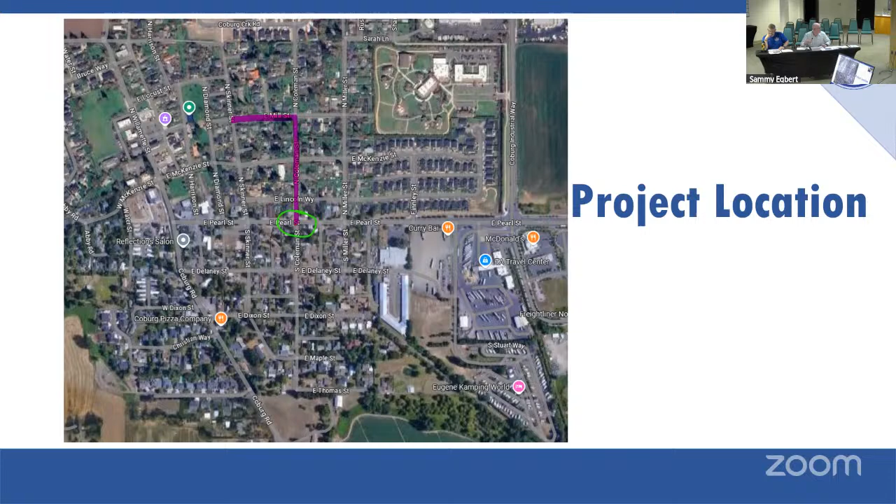The next slide gets into our actual transportation system plan designations. This is from 2014, the TSP, which at some point we've talked about a bit.

So this side of town, the west side, doesn't have any streets with a collector designation. Those are all local streets that go straight to North Willamette, which functions, kind of skips the collector step and goes from neighborhood street to arterial and functions well. If those streets connected as a network, it might be a different story, but they don't.

So the primary collector that we have is the Coleman Street spine, that then turns on the south end as Dixon, and on the north end does multiple jogs.

For money reasons and for TSP and policy reasons, we've broken this into phases. The money I described, 748,000, we're hoping that we hit the mark there. We may be a little bit over, depending on what the market has when we add engineering to it.

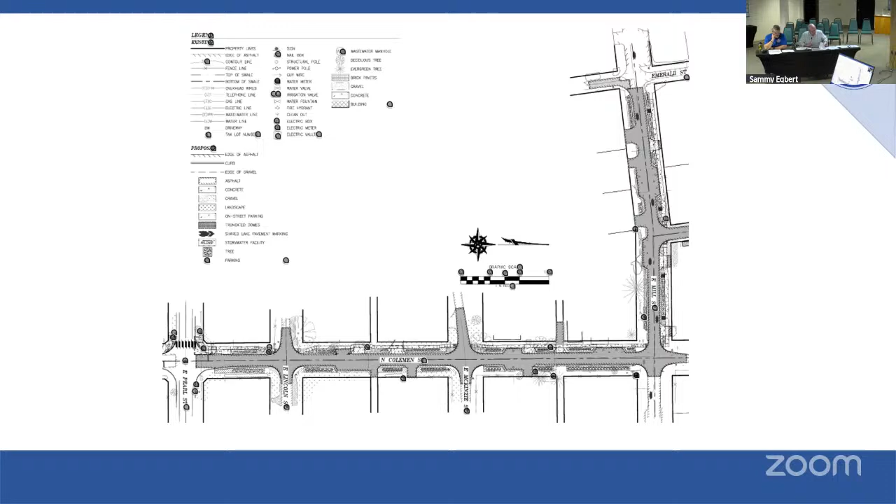Trying to think of where the slide is—one part of the memo talks about some access issues, and one of the goals is, where possible, to utilize alleys for access rather than extra driveways.

Thanks, okay, yeah, I know I'm bouncing around a little bit. That's perfect, thank you.

So we have one site in particular where we've really focused, instead of having two auxiliary driveways near an alley, we've consolidated that by extending the alley improvement and having people come off the alley. Their alley will be paved and they come off of that. That might be the easiest.

That's one of the considerations, and one of the standards in the street standards is to attempt where possible to minimize driveways, to encourage shared driveways. This one, right? Yeah, so there were kind of two informal driveways here. If we maintain the existing pattern and just paved where people had been doing things, we would have a driveway in this area both to the right and the left of it.

We've shifted the storm drainage to ensure this one is a full width access for this property, but their secondary access now comes off the alley. And this one, we've extended as much parking as we possibly could, moved some of this storm drainage here, and then came off the alley. So instead of coming off the side here, they'll come in with a paved alley and turn in, still having access to the rear of their yard, just a slightly different way.

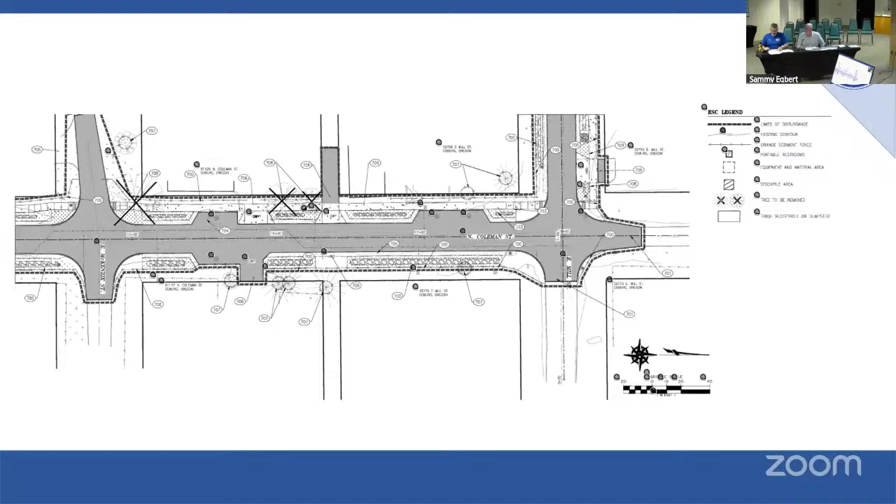There are some trees - one significant one, but it's been rough by nature and by humans. It's one of the bigger, older ones, and it's probably due anyway, plus a few smaller ones. So it's not significant on tree removal, but there are some. That might be a blessing in disguise. Agreed.

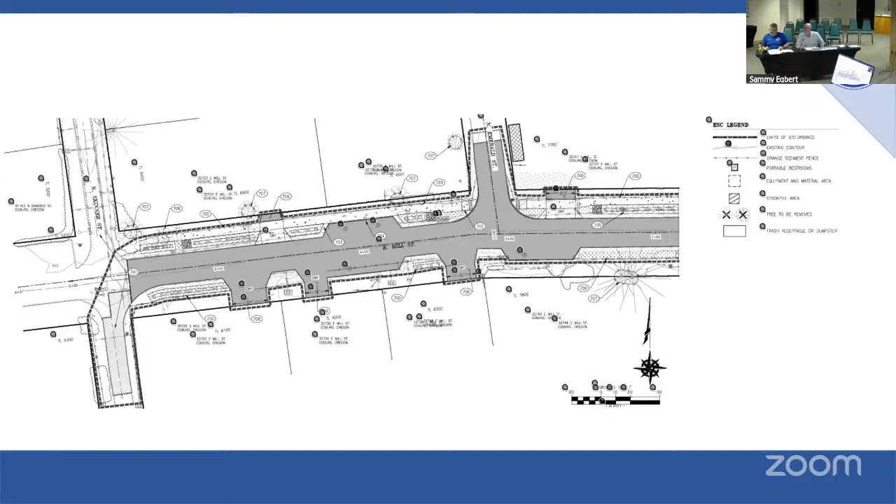Any other tidbits? This is one down here at the bottom - Mill Street going west towards Norma. If you turn south on Skinner, there's a particularly bad stretch there. I think this is a great idea that Brian had of how we can extend paving only. This is more of staying below the threshold of needing to do full storm drain there - we're just adding some asphalt. It's not going to have the same complete base that the rest of the project has, but it buys far more years than cold patch would there. I think it's a really smart move, and we've identified the extent of that. So we're really squeezing as much as we can out of this project to benefit the street system.

So here's the schedule. Looking at that's right around next week, having the final design and review all the 90% plans that we get our hands on and do a final walkthrough. Tentatively planning, it could be the week of April 7th, or it could be the week of the 14th - either one, we haven't landed on it, but just wanted to be sure that embedded in the schedule is an open community open house here with big 24x36 plans out.

I think similar to what happened with North Willamette, which sounded like that helped a lot. At that same time, we'll take notes and try to educate, but also just take notes of concerns, see if there's any adjustments that could be made to fine tune based on those concerns. And then also offer up one-on-ones on site to just kind of walk it and look at it, because sometimes that's way better than looking at a set of plans in a building. So Brian can work his magic out in the field.

So the house that just put in the new fence, did they get a permit for that, or were they replacing an existing fence? I think... well, maybe. They replaced something that was existing in the right of way.

Something like this, what we do is the project will cover the cost to relocate that back out of the right of way. So instead of totally removing it, we'll just relocate it back. The cost is probably going to be minimal, but there will be a cost to the project to do that, because it's not that difficult to move that style of rail fence.

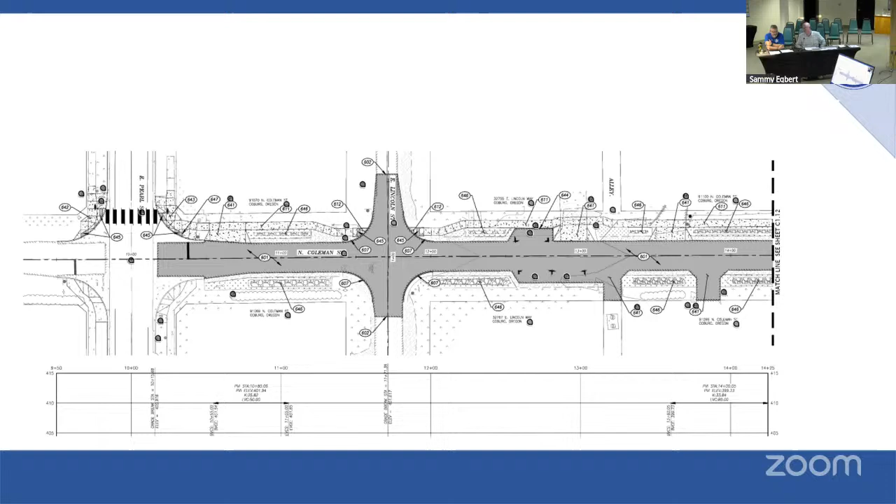Back to the project, we'll wrap this up and move on unless there's more questions. Here's the layout: open house in one of these two weeks, then double back around for any fine tuning before the bid goes out. The bid process is about a month. Bid intent to award happens after those bids are evaluated, all scored, and the lowest responsive bidder is selected.

I think we talked about what 'responsive' meant when we had a bidding appeal, right when I got here. Then it comes to council for your approval, the local contract review board process, where you ensure the bid process was followed.

And then, tentative — both of these dates are tentative. Oh geez, May... that meant June. Yeah, not going backwards. That's a June 26th start date.

And again, if we are really close to that, we may wait till after the 4th to start, because if we're that close, we don't need to make a mess before that. One of the goals is to have as open-ended a start and stop date as we can, giving a broad window.

That proved fairly successful from the cost standpoint with the bids on the North Willamette project. With a window, we found that several bidders submitted bids on North Willamette, which helped us really pick a low bid.

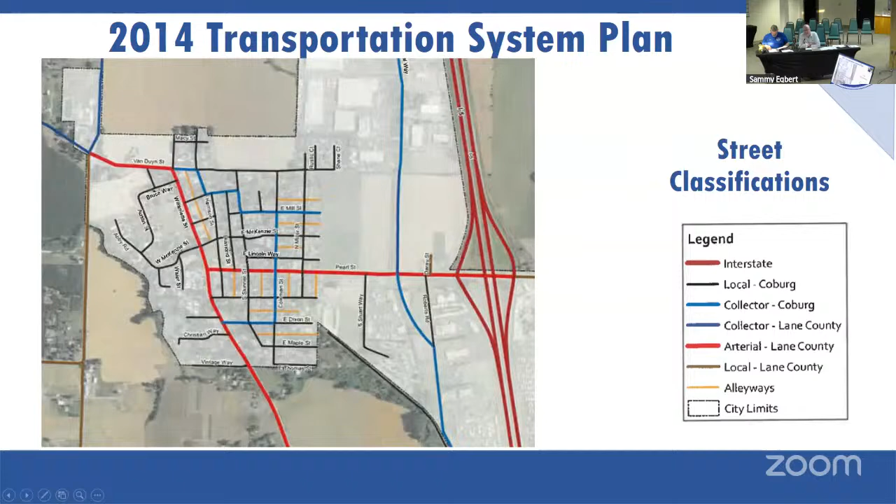My couple of comments that I hit a little bit on then is that, as you all saw from the kind of questions and what was posed in the depth of those questions, the intention is sentiment, general values, and eliciting those open-ended comments just to help inform - it's one component of informing future decisions for council, and how we bring things forward to you. I thought the question on communication, on how people want or expect to receive information from the city, was very telling. We'll focus our work plan, our communication plan, to hit that.

It's what we kind of were assuming - it kind of validated what we thought was the preferred methods, the primary ones. But I think it's always interesting to especially get those open-ended things, to get people's opinions and their level of understanding of what we do and why. That helps kind of flavor what public outreach and education we might find is valuable, and some stuff may not rise to the level of educating - it's just opinion. Still good for you all though.

So I don't know if there's anything in particular that you wanted to hit on with the survey. My summary is that it wasn't intended to be a statistically valid sampling that should be followed blindly. I thought it had really good sentiment in it and really high marks. I've seen many surveys where people don't really even like the town they're living in, they're just full of negativity, and this wasn't. So I think from a broad, 30,000 foot level, the takeaway of those that responded - that's pretty solid response for one, and a pretty positive response. And then the criticisms are stuff we can work on.